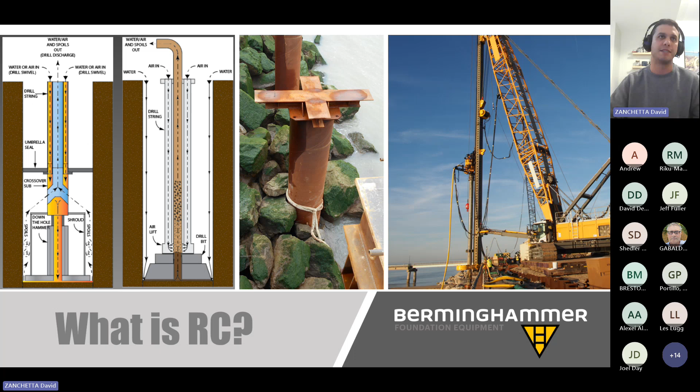The next slide gives you an idea of what these kind of installations look like. I'm going to give the example of a casing advanced installation using reverse circulation drilling. This is a video taken in France, and it's a good example. You can see in this case they're just discharging back into the ocean, but it's very common to discharge into a pit, a container, or a dump scow.

You can see that the conventional method of installing these piles might be to vibrate or drive them to the rock and then go clean them out with a hammer grab and drill the socket afterwards. But when you use casing advanced RC drilling, you can install it all in one go. You grab the pile that has a ring bit on it and pull it up the drill string, kind of like putting your sock on your foot, and then drill it in. This video gives you an example of what it looks like.

So how did the RC swivel come about? Well, Berminghammer is well known for vertical travel leads, which can take a crane a customer already has and make it into a foundation rig. Many people don't know that Berminghammer has made and stocks dedicated RC drills. All of them incorporate an RC swivel.

Going from left to right at the top, there's been a couple models before this, but we have the BHD 40 - the 40 stands for 40,000 foot-pounds - BHD 80, 80,000 foot-pounds, BRC 75, BRC 32, BRC 100, and BRC 200. The largest of the current model drills, on the bottom of that series, is the 200,000 foot-pound RC drill.

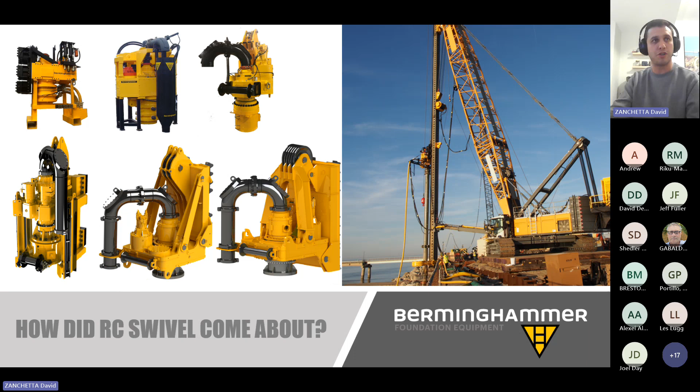Now you can see in each of these later model drills what looks honestly like an RC swivel on top. I'm going to bring out the laser pointer here. You can see this portion and then the discharge tube. That's an RC swivel right there, and then the discharge tube. So we manufacture drills that come with RC swivels in them, dedicated to do this type of work because we do it so much.

So how did the RC swivel come about? Essentially, our customers came to us and said, we have installations that are in and around 50 to 60 feet, and we have our soil drilling rigs. Can we use that? Just like you can put a foundation rig on a crane by using a lead system, you can drill hard rock on a conventional soil drilling rig by putting on an RC swivel. So that's where the idea was born.

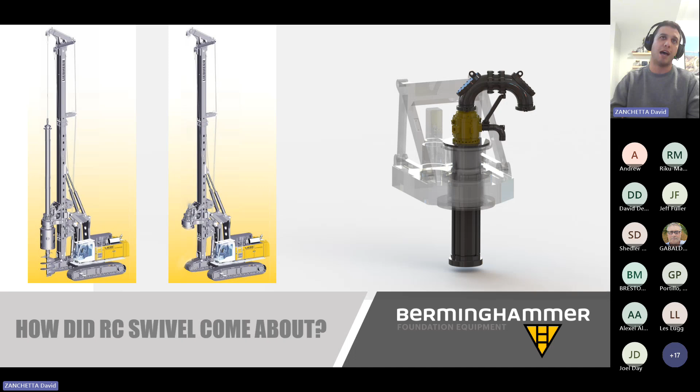Here's just a little illustration or graphic showing the rotary transparently, and then the spindle we put inside with the RC swivel on top.

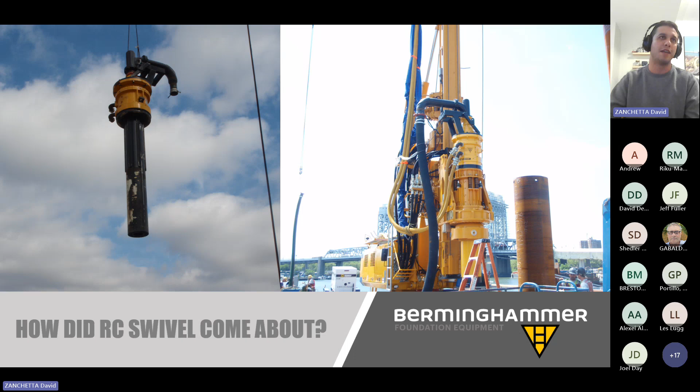So our first customer, this was on the east coast of the United States. I just want to show these pictures because it shows how essentially we replace the Kelly bar and put in what we call an RC spindle. The spindle replaces the Kelly bar, and that's what's turned. Above that, you have your swivel and discharge. And that is essentially how the RC swivel came about.

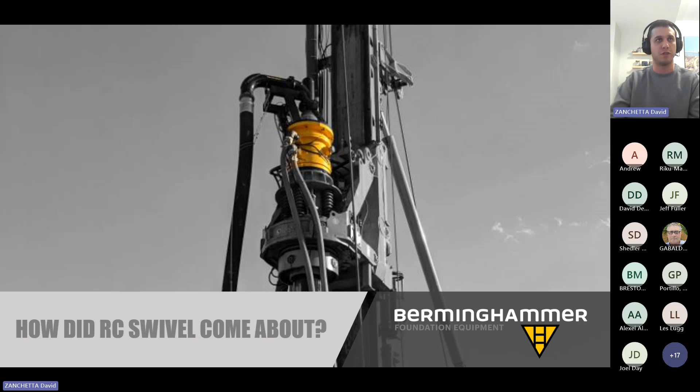We're making them for our RC drills, and then we realized we could retrofit drill rigs with the same swivels.

So just a little bit of terminology. I'm going to bring the laser pointer out here again. Going from the top down, we have our discharge elbow. A lot of cuttings are coming up this discharge elbow, being turned at 90 degrees and then turned another 90 degrees to come down. So what we've done is we've made on our RC swivels two wear pads that are hard faced and can be removed. As these are being sandblasted all day from drilling, we do have replacement elbows that can go in, and when the plate's been worn down enough, they can be replaced.

Below that, staying on the left side here, we actually have the RC swivel itself, and that connects to the rotary in two places. It kind of bears on a top surface here, but we have a torque reaction frame that connects the RC swivel back to the rotary, just so that it's not spinning with everything. And then below that, we have the spindle, which is the part that replaces the Kelly bar. And then below that, we have adapters to our various drill string sizes.

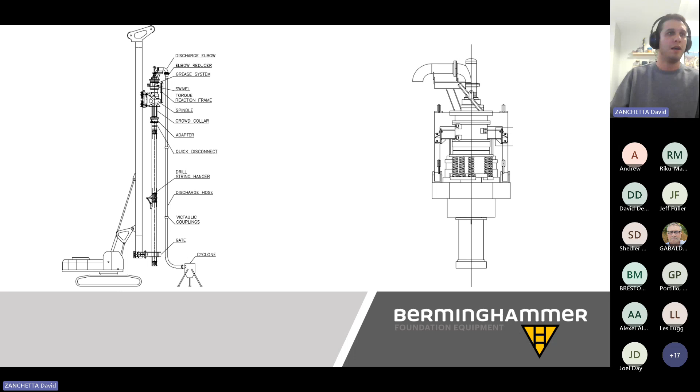Below the drill string, especially in the application of down the hole hammers, we like to have a gate to be able to hold the pile in place and drill accurately on location. Now on the right side, we have our discharge hose, which then heads down to a cyclone, and that cyclone helps slow down the cuttings that are coming flying out of the discharge hose so that they can deposit gently into wherever you're going to deposit them, whether it's a dump, a container, or a pit.

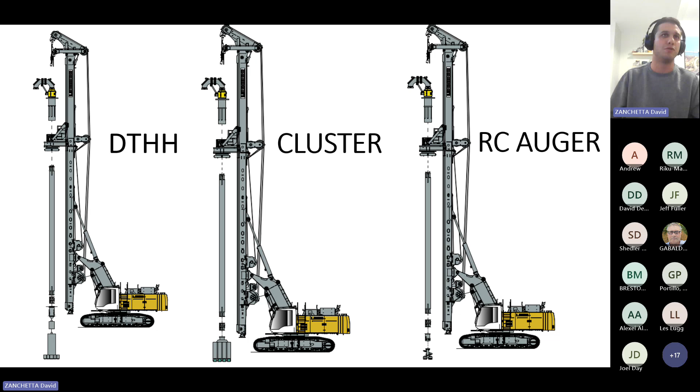And the RC Auger is a new technology that I'm excited to talk about. I'll explain a little bit about that one later. So these are pictorially what they look like, but the next slide shows kind of what they are in real life pictures.

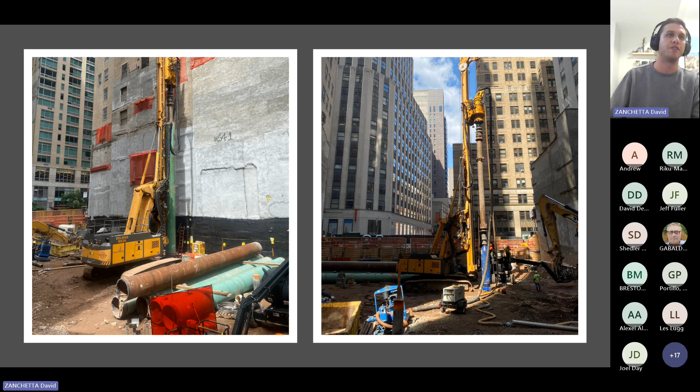So this next little animation was taken with permission from MinCon's website, along with the photo as well. One of the uses for the RC Swivel is to do these diaphragm wall installations. So you can see they have pipe with interlock, and they get the next section of pipe with the interlock on it. Again, with the down the hole hammer, same idea as the previous slide, but with a connector to the next pile, and then they're drilling in rock pretty well immediately to install the pile and install the wall.

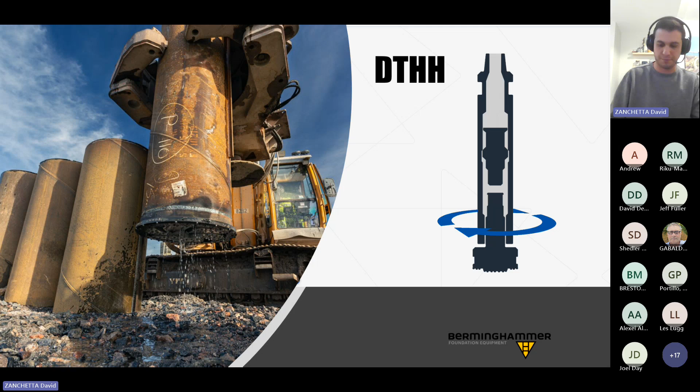So the setup consists mostly, again, our RC swivel up at the top, the drill string, and then we get down to the crossover. This is the piece that allows the cuttings that come up the side here to redirect and go into the center of the drill string, which allows that reverse circulation.

Going from the bottom up, we have the drill bits, we have the down the hole hammer, a shock stub. In this case, we have a long extension, and we have a shroud on the outside. All of the cuttings would come off the bottom here with the air, come up along the side of the shroud, and then be redirected into the crossover and up through all the drill string and to wherever we want to store it.

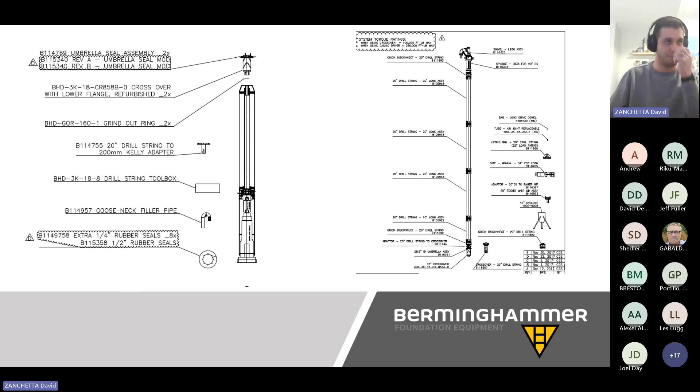In St. Louis, they were drilling a large storage tank right in rock about 200 feet below ground so that they could deal with a problem that many cities deal with, which is storm events overwhelming their water treatment plants. So they were installing a really large, for lack of better words, a shaft horizontally 200 feet below ground, and that would store all of the combined waste and storm water that was overwhelming the system until they could treat it. So as part of that installation process, they needed a couple access and ventilation shafts.

They had a discharge pit just off camera view again. They had a discharge pit where they had dug out an area, surrounded it with concrete blocks where all of the discharge would go settle, the water would seep out of it, and the remaining cuttings would be in that pit.

So now we're going to talk about the RC Auger, which is a little bit of a newer technology that's come out in the past couple of years, again developed by Berminghammer. And in these videos that I'm going to show you, what I'm outlining is a process of cleaning out a pile. So whether it's an auger or whether it's a clean out bucket, when you have a pile installed, it could be in a marine environment, could be just on land like this, and you need to be able to clean it out.

The process can be quite slow.

So if you had hundreds or thousands of these piles to clean out, you're constantly tripping back in and out of the piles to be able to clean them out. In marine environments, sometimes you'd use what's called a hammer grab to go in and clean the piles out. Again, it's a slow process because you have to go into the pile, take a little bit of material out, dump it somewhere, and come back in.

So if you have the RC swivel and drill string and an RC auger, what you can do to clean out these piles instead is go in with one insertion. If it's an LB36 with roughly 65 feet of stroke, instead of tripping in and out multiple times, you go with one insertion, use air, use water, bring all the material out at once, discharge it wherever you want, and instead of taking a lot of time tripping in and out, you're in and out of the pile very quickly.

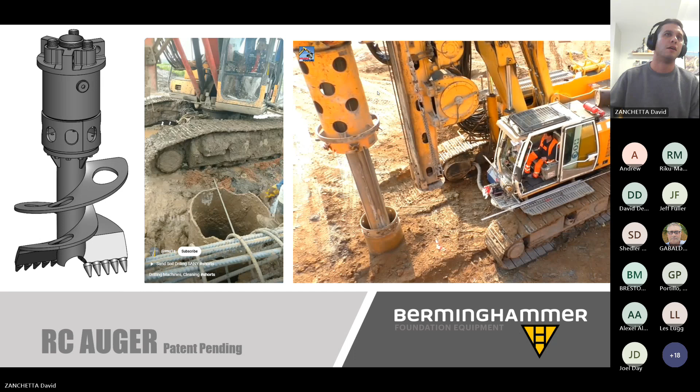Now, the next thing I promised to talk to you guys about is the ready to RC swivel rigs. We've done quite a few of these conversions on multiple different rigs, and I put together a list of all the rigs we've already done. It doesn't mean we can't do others, as long as it's common Kelly bar sizes, or you can get us a little bit of dimensions so we can make a torque reaction frame. We should be able to retrofit most rigs that have a Kelly bar, so most rotaries with a Kelly bar we should be able to retrofit.

But here's the ones we've already done, so we have a pretty good understanding of. In no particular order: we've done the LB28, the LB36, the LB44. The spindles you see on the right beside each one are the spindles associated with each one. For Bauer, we've done the BG24, 25, 28, 36, 39, and 40. And Delmag, RH26, RH28, and Yutong 280. So we've done all of these rigs before, some of them with multiple different spindle types, addressing the different types of drill string we were attaching.

One thing I wanted to touch on is that there's some commonality. Most of the rigs separate the Kelly bar they use at around 28 and 36. So below the 28s, you have Kelly bars typically in the range of 15.5 inches to 16.5 inches. And above that, you have Kelly bars typically in the range of 18.5 inches and above.

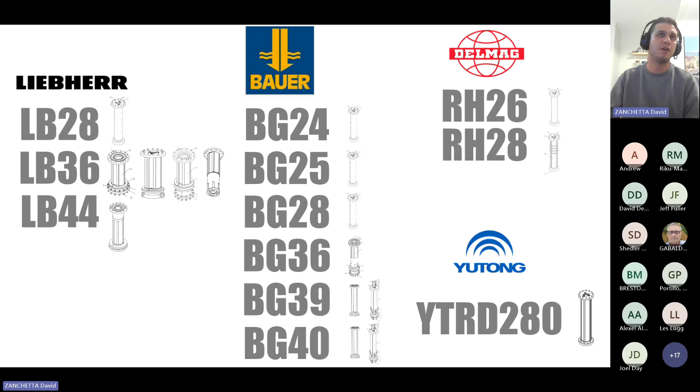So our RC swivels have matched those two categories. We have what we've now named the RCS 36, for your conventional drill rigs that are 36 and up, and the RCS 28, for 28 and below. The RCS 36 has a 12-inch center passage, which becomes important for the volume of cuttings you're putting through. If you have a really large cluster drill with a lot of cuttings coming back up, you want as large a center passage as possible. With the larger Kelly, you have a larger space for a larger center passage. The RCS 28 has a 9 3/4 inch center passage, going into 15.5 to 16.5 inch Kelly bars. These are the two main RC swivels we have available to the market right now.

I just wanted everyone to understand how they were positioned: the RCS 36 for rigs that are 36 and up, the RCS 28 for rigs 28 and below.

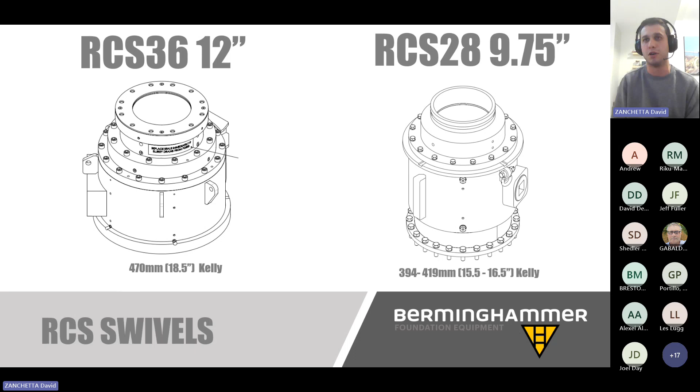And with that, that actually concludes the main content part of this presentation. I've got about 7 minutes left, so hopefully a little bit of time for some questions.

It doesn't seem like I'm getting any more questions coming in. Oh wait, one new message. Oh, just a thanks. Okay. Yeah.